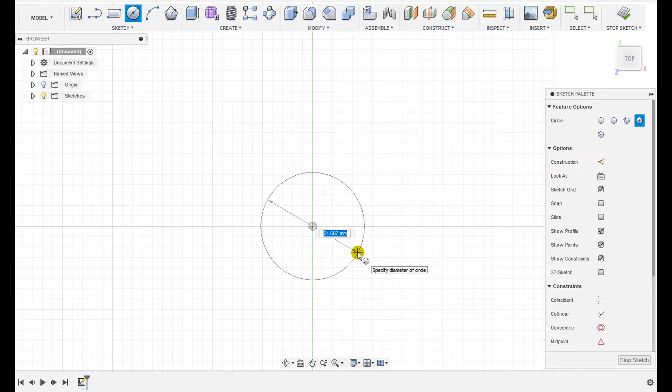So I needed a new cap for my spare fuel can, and thought that 3D printing was probably the way to go. So this is my process through the Fusion and then on to printing it out. So I opened a sketch, started to draw top down with a circle 42mm in diameter. I then offset that by 3mm, which is what I wanted the wall of the cap to be.

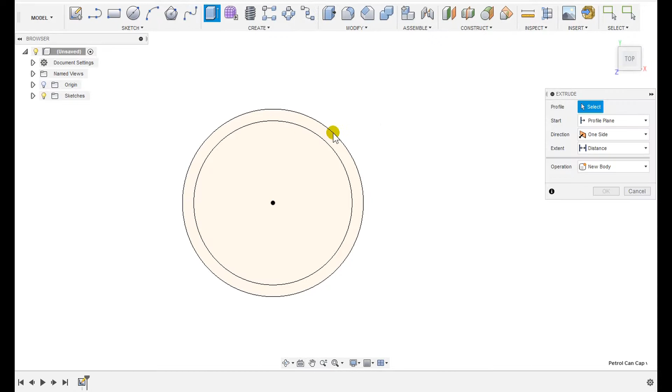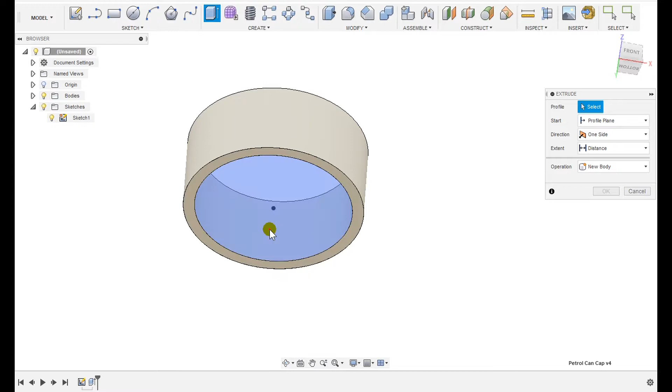I then extruded the wall up by 20mm, and then extruded the base down by 3mm. I then wanted to put a really coarse thread in it, and the easiest way I found to do that was to use the coil tool.

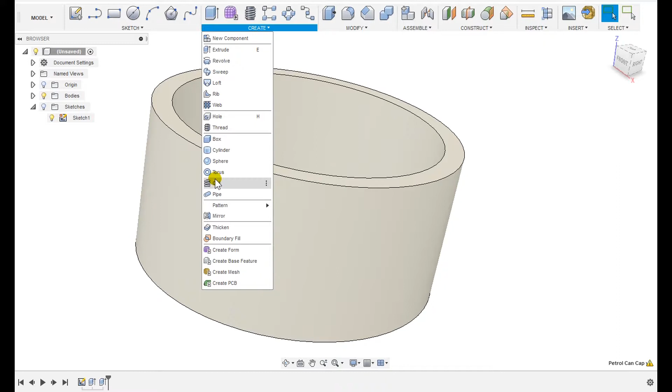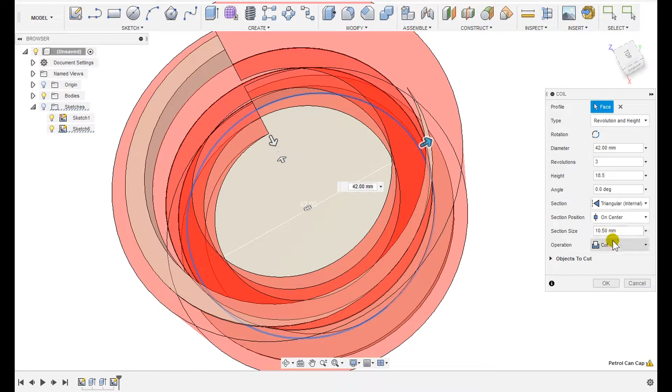So I got the coil feature up, selected the plane face that I wanted it to be on and the center for the coil. I set the diameter from that circle, revolutions, height, the profile, internal thread, and the section size being 10.5mm, making it a join, not a cut. Got all these dimensions from the can that this was going to thread onto.

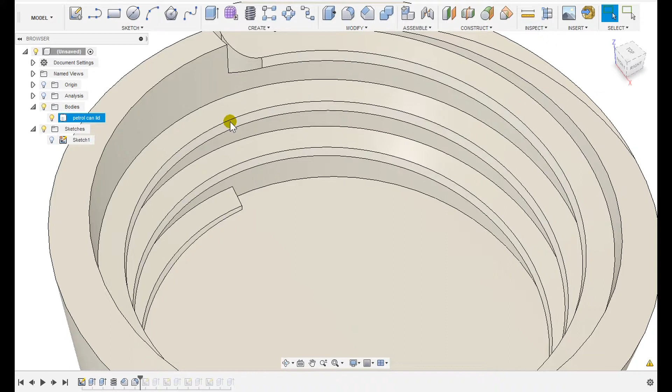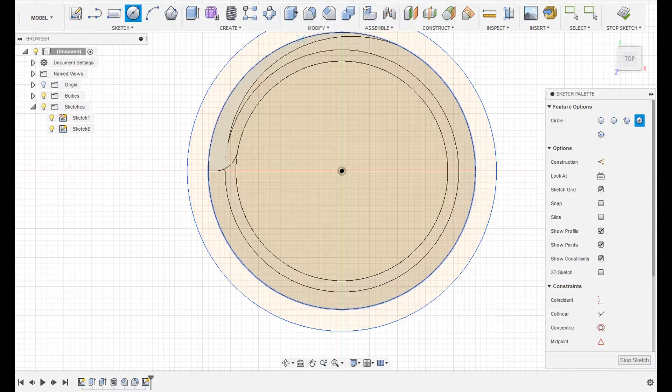I then chamfered the thread by 1.2mm and filleted where the thread would start, and I did that by 4mm, which seemed to be fine. To clean up the top of the cap, I created a sketch at the opening top and drew a circle, and used this to make an extrusion cut to the top of the thread. That cleaned it up and made it flat.

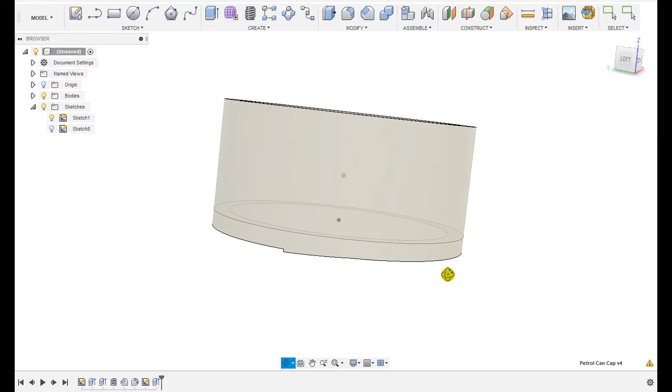Here you can see that where the thread begins, it just sort of sticks up a bit too much. So I selected that, and then, as I say, made an extrusion cut, and that seems to have cleaned that up nicely. I then created another sketch on the inside bottom for where the seal would go. I made a circle of, in this case, 30mm, and offset that by 1.7mm, so that was the size of the seal.

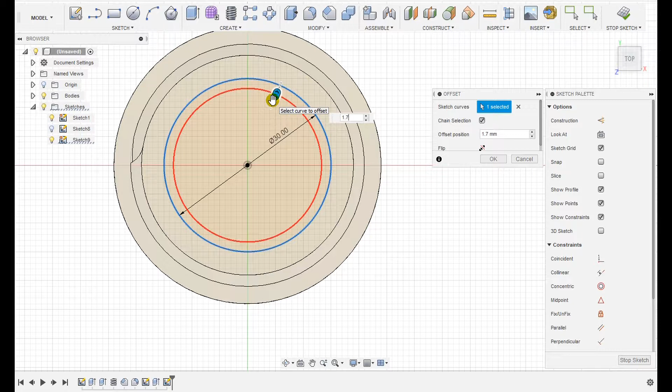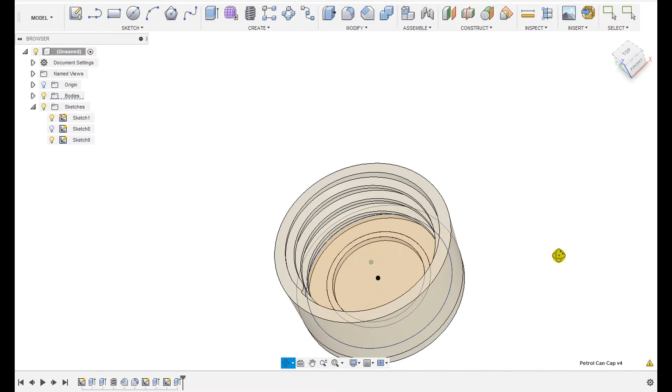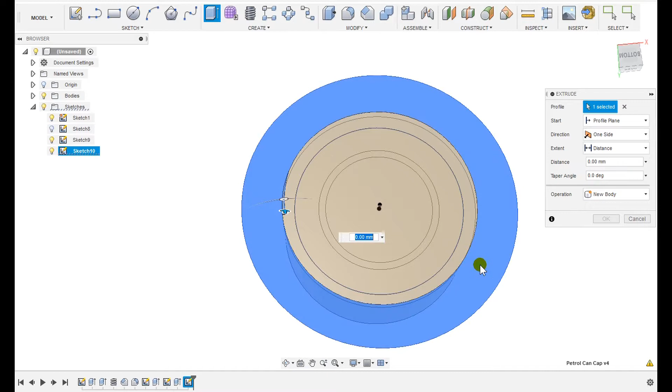Then I extruded the various parts to make a gap for where the seal would sit, and it would be held in position. I then created another sketch on the bottom, drew a circle, and this is to clean up the bottom of the lid, where there are a couple of anomalies from parts of the coil. So just cut those away, and that cleaned up the bottom edge of the cap nicely.

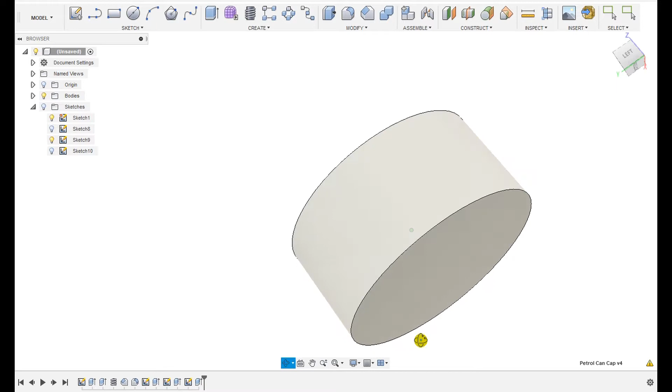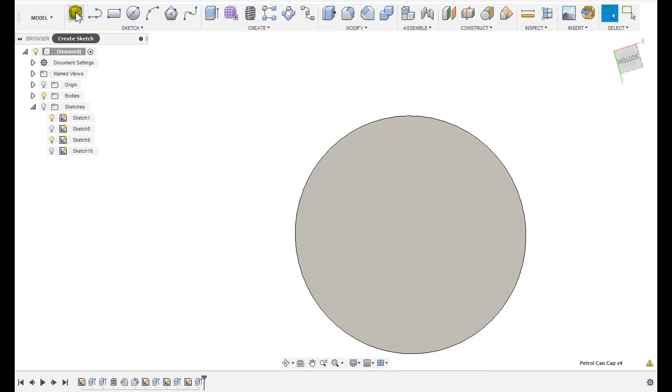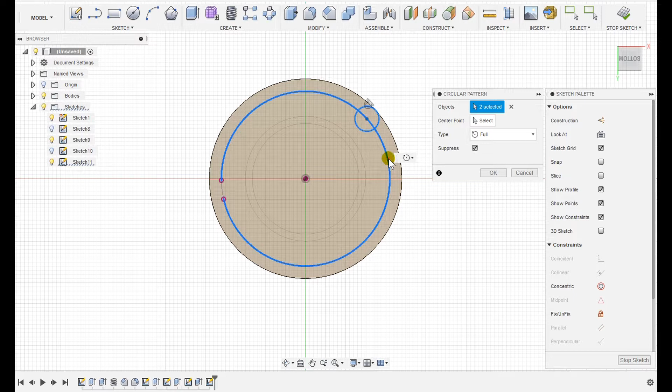I then wanted to create like a knurled effect on the outside of the cap so that it was easier to grip. So to that end, I created another sketch on the top of the lid, drew a circle and then created a pattern from that circle. So the circle was the thing that we're going to make the pattern from, and I selected that part of the sketch by mistake, so deselect that, it's easy enough, and then created a pattern around the center. It defaults to 3.

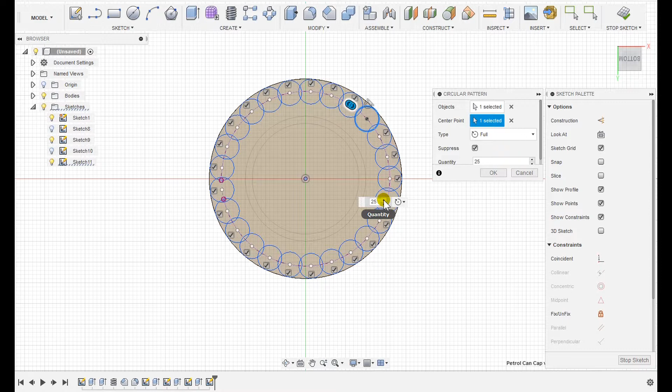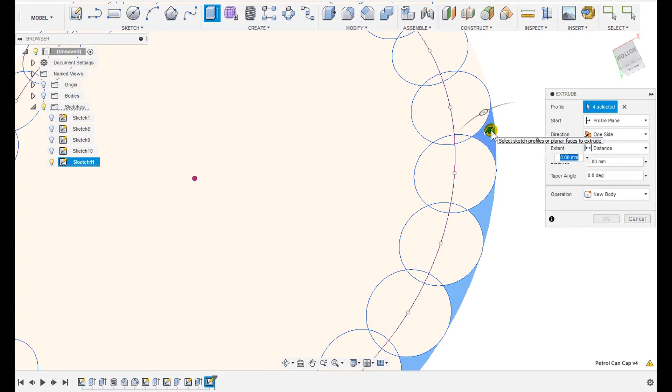I wasn't sure how many I would need, probably more than 20, but I just kept clicking until the circles intersected and it gave me the right sort of pattern to be able to grip the lid. So once I'd created that pattern of circles, then it was just a case of selecting each part from the top that I wanted to extrude down to cut away. I deselected the model just to make it easier to select these bits. I'm sure there's a quicker and more efficient way of doing this, but this is the way I did it, and it seemed to work for me. It just took a few seconds to do this.

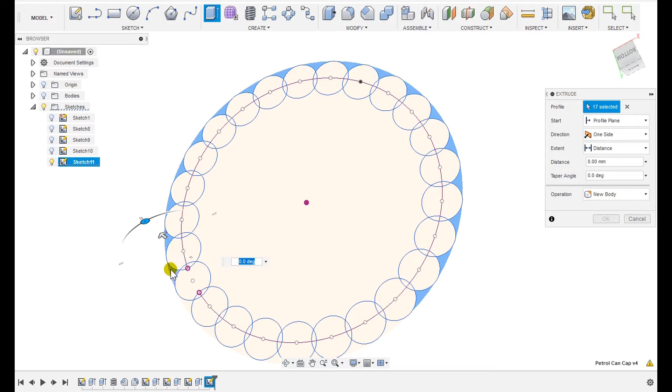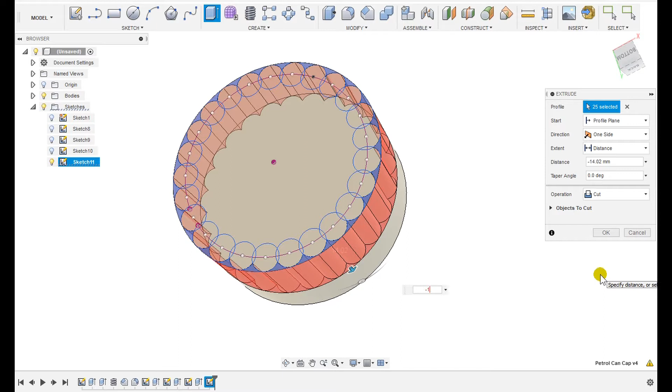And then once these little bits were selected, I then clicked on the body's light bulb again to show the body, and then extruded them down as far as I felt was necessary. I think I made it 15mm using a cut, and that gave me the petrol cap that I wanted. It didn't take too long to put this together, to design it.

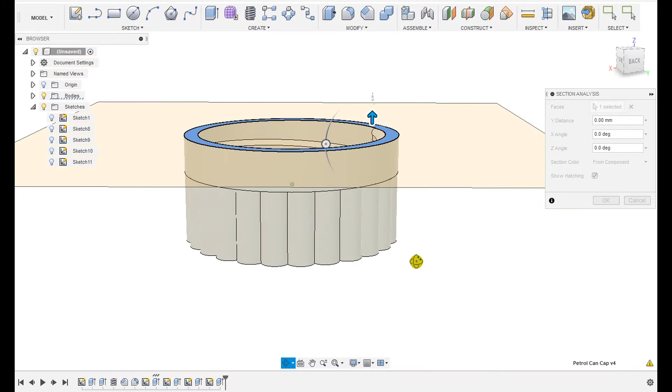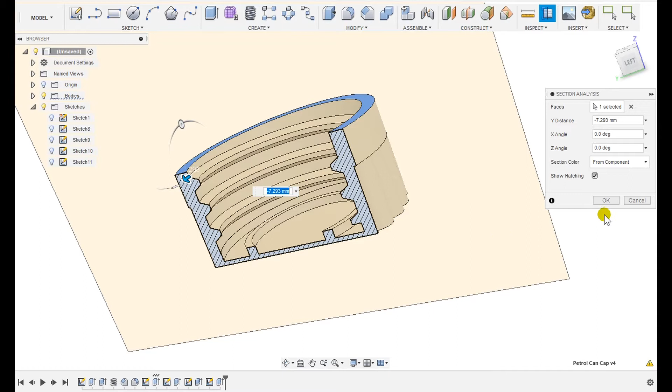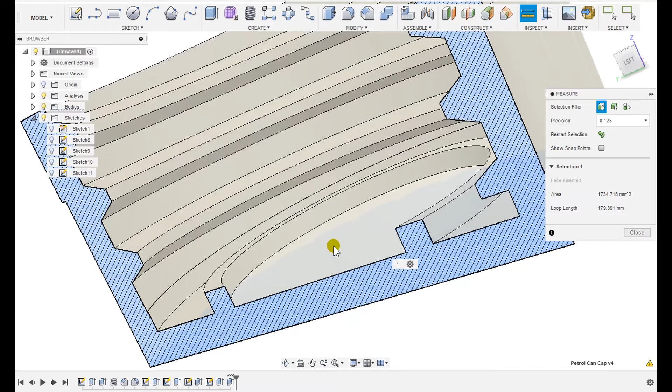Just getting the analysis cross-section tool, just to have a quick look and see what it looks like. The base looks quite small actually, so I think I'll extrude that down to give it a thicker base. That's way too small. That's not the 3mm, it's probably 1mm, so I'll add a couple of millimeters to that. Yeah, that looks far more uniform, and we can use the measuring tool to see exactly how thick the base is. And there you can see it's 3mm, which is ideal for me. You can see the cutout where the seal will go, and the threads and the profiles on them.

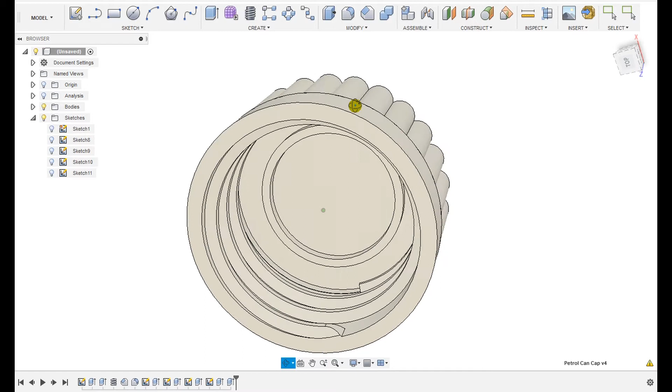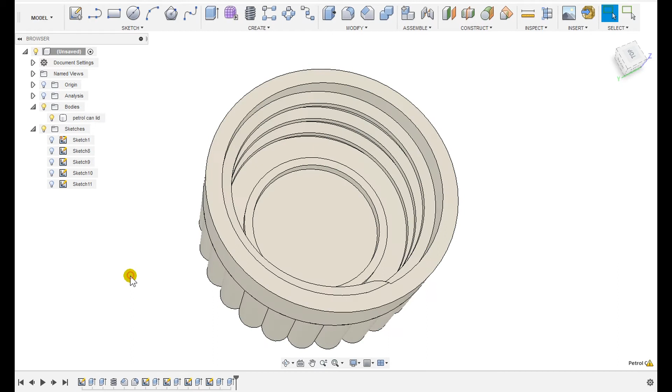Then it's just a case of saving it out as an STL file and printing it. Again, I printed this I think in ABS on my Anet A8. I've got a little video of it on the can, so you can have a look at that, and that is basically it. It fits a treat, it works, I think it looks quite good, and that's the whole point of design and 3D printers. You find something you need and you print it off.